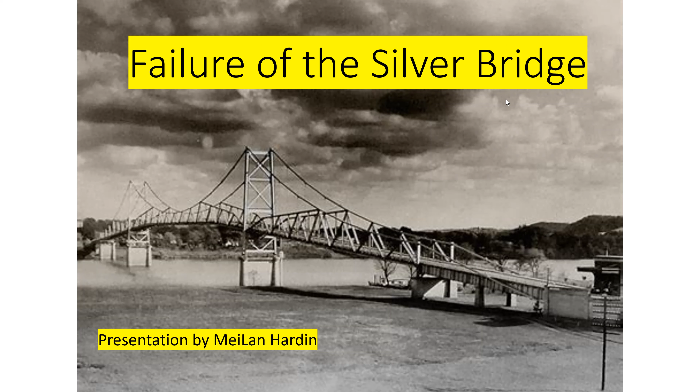The Point Pleasant Bridge, nicknamed the Silver Bridge, was a two-eyebar suspension bridge that opened in 1928, which connected the small communities of Point Pleasant, West Virginia, and Gallipolis, Ohio. The bridge collapsed 39 years later on December 15, 1967, killing 46 people during the evening rush hour. It remains the deadliest road bridge collapse in American history.

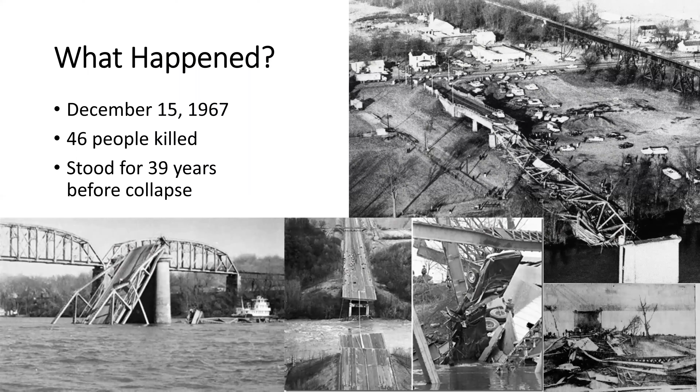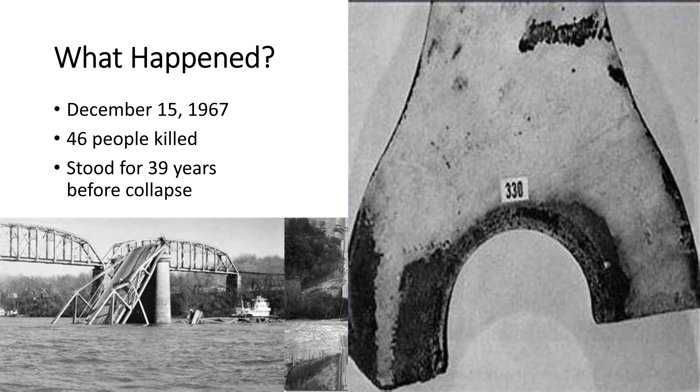So what went wrong? After a thorough investigation, it was found that a 1/8-inch manufacturing flaw in eyebar number 330 was the culprit. The propagation of this fracture and failure of this eyebar will be discussed in detail in the next few slides. Eyebar number 330 experienced high levels of fatigue up to the point of failure.

Fatigue is a form of failure that occurs in structures subjected to dynamic and fluctuating stresses, often resulting in a brittle fracture, even in normally ductile material. Fatigue causes failure to occur at stress levels much lower than the designated yield or tensile stress of a static load. The stress level just before reaching this failure point is called the fatigue limit. A fatigue limit for bridge materials, often steel, ranges from 35 to 60% of the tensile strength.

In the case of the Silver Bridge, it was made of a newly invented, high-strength, heat-treated medium carbon steel that had an ultimate tensile strength of 105,000 psi. This puts its fatigue limit between 36,750 psi and 63,000 psi.

At the time when the bridge opened, the weight of an average car was around 1,000 pounds, but by 1939 the weight nearly tripled. This sometimes put almost 70,000 pounds of stress on the bridge at one time, a value well beyond the fatigue limit for the type of steel used on the Silver Bridge.

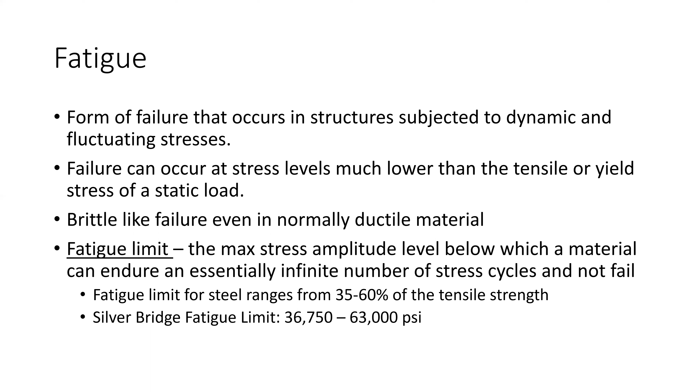There are three steps to fatigue failure: crack initiation, crack propagation, and final failure. Crack initiation is when a small crack forms at some point of high stress concentration. A stress concentration, also known as a stress raiser, is a small internal or surface flaw or a structural discontinuity at which an applied tensile stress will be amplified and from which cracks may propagate. Points of discontinuity include holes, grooves, notches, and fillets.

In the case with the steel eyebar, the point of high stress concentration was at the inner edge of the eye hole. This type of stress concentration results in a crack that is perpendicular to the applied stress load, as shown in the red arrows.

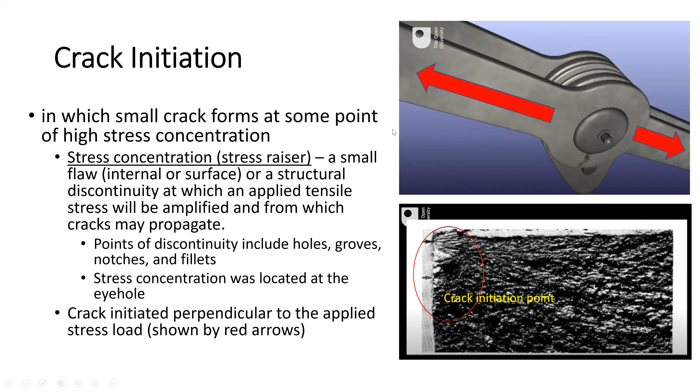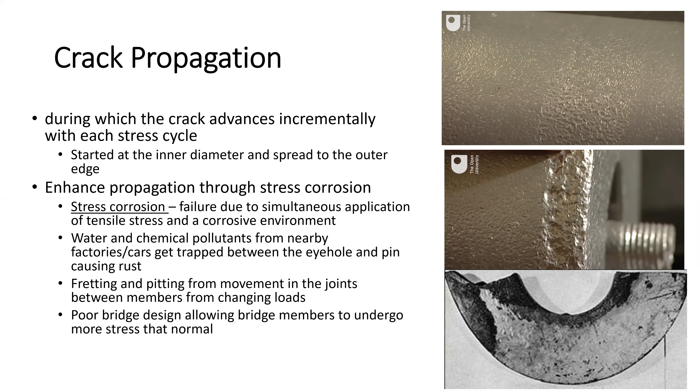Crack propagation was advanced by additional corrosion fatigue, a type of failure that results from simultaneous action of cyclic stresses and chemical attacks. Eyebar 330 suffered from rusting from water getting trapped between the eye hole and the pin, as well as pollutants from nearby factories and automobiles. Fretting and pitting from movements in the joints in response to changing loads encouraged further degradation. The corrosion coupled with poor bridge design resulted in the eyebar having an abnormal amount of stress on it.

The crack eventually made its way to the outer edge of the eyebar, resulting in a brittle fracture on the side where the crack first started, as indicated by the smooth break in the picture, and some ductile fracturing on the opposite side, as indicated by the jagged edge in the picture.

Elongation of the eye hole also occurred, resulting in a 4.5-inch gap when the eyebar was pieced back together for examination. It was found that the head of the eyebar was loaded with 3 times the amount of stress as other parts of the bridge, which could explain the amount of elongation in the eye hole and why the eyebar also had hints of ductile fracturing.

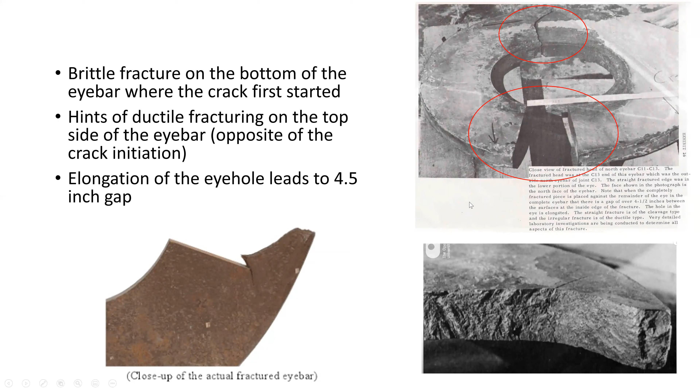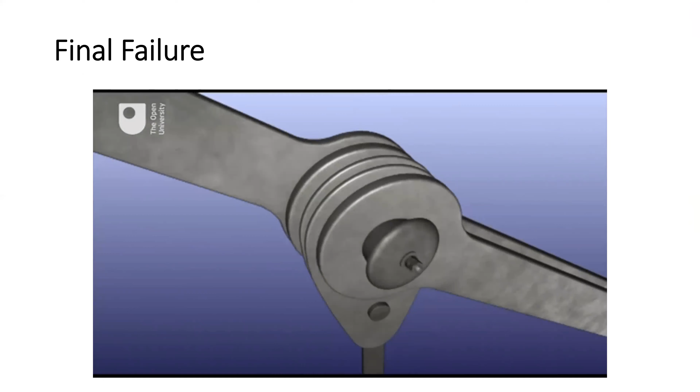The high strength, relatively high carbon content, and heat treatment of the eyebar steel results in a more martensitic microstructure, giving the highest hardenability and strength, but very low ductility. Hence, this microstructure helped facilitate the brittle crack propagation of the eyebar up to the point where it starts to fail. Once the eyebar failed, it caused a force imbalance that the bridge was not designed for. Hence, once one piece of the bridge broke, the whole bridge went into total failure and collapsed, as seen here.

In the aftermath of the Silver Bridge collapse, President Johnson set up a standardized national bridge inspection program, making it mandatory to inspect all U.S. bridges every 2 years. Improvements could also have been made, such as additional anti-corrosives to the steel, strengthening the bridge by adding more eyebar members, and using heat treatment such as tempering so that ductility is not fully lost in the steel.